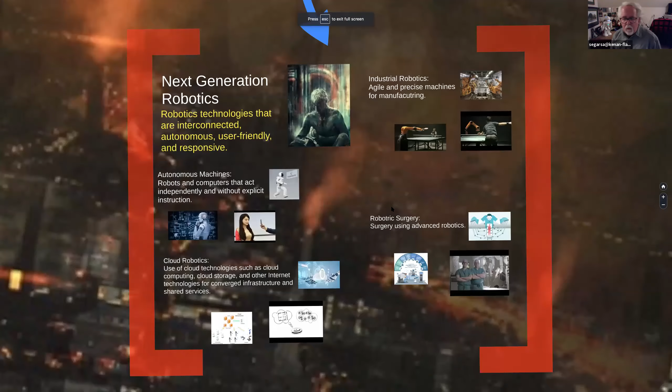So we've gone all the way around the clock here in terms of our 7 technologies. This is the 7th technology. And I'll have to say, also, one of my favorites, perhaps because of a lot of the experience I've had in my own background. But basically, next generation robotics are interconnected. They can be autonomous. They're user-friendly and responsive. So don't think of robotics as what we've seen in the past.

This is a new generation of robotics that uses cloud computing, that uses mesh networking, very close range, high bandwidth type of communication. And those robotics are user-friendly and very responsive to our commands, and actually, in some instances, anticipating what we need. And of course, if you just want one to rock out with you, they're good for that too. So they're a whole different generation of robotics, revolutionizing everything from manufacturing all the way through human interaction. An incredible frontier out there.

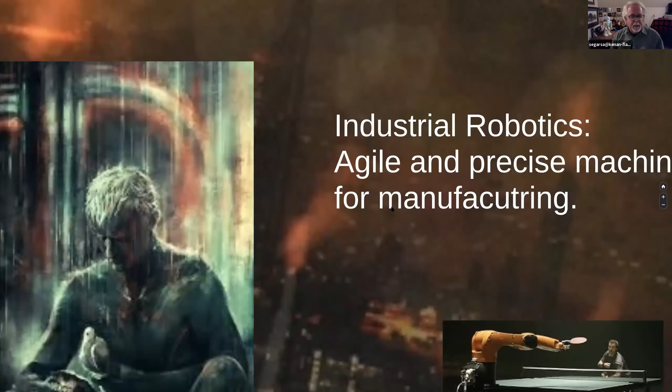So let's take our first stop, and this is industrial robotics. Again, agile and precise machines for manufacturing. This is incredible in terms of what has transpired and how these machines have evolved over time. And you can see in the photograph there to the right, this is a Toyota factory, and these are KUKA robots from Germany that are actually working on this particular automobile. And again, everything from welding all the way through metal fabrication to even the installation of electronics. These are done by industrial robotics.

And what's really interesting about this, if you've ever worked in production, one of the costs of production is called staging. And basically in staging, what happens is you have to restage a production line for a different run of an automobile or any product. And staging costs can be very, very high. And it can be very expensive to move equipment in and out of staging areas. That has radically changed with robotics these days.

Robots can stage several different production lines without moving equipment around, without a whole lot of work other than reprogramming the robotics for the different product coming through the line. So your staging costs are going way down.

That means you can customize a lot more. So when you start to think about the impact of these different technologies, you have to think a little bit about how they're evolving, not only in terms of what they're able to do mechanically, but also what they're able to do in terms of changing business models, changing different production lines, and changing the way a company might think about its products as well as its manufacturing. You're really starting to see a lot of revolution that I think is new and novel, giving rise to a lot of different applications.

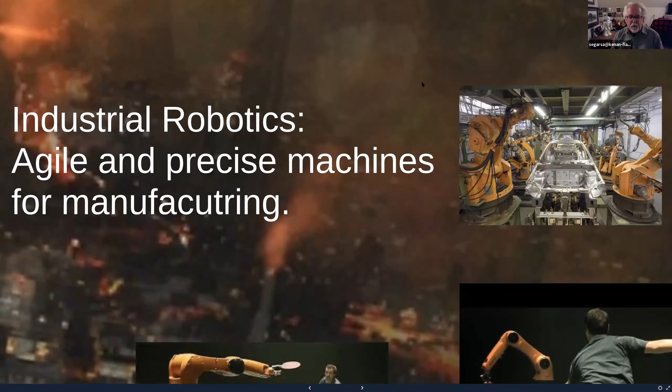Let's show you an example of how agile, how precise these machines can be. One of the companies we visited for this research was KUKA Manufacturing, KUKA Robotics, and they actually have a demonstration technology, a robot that can play ping pong at a world-class level. So let's take a look inside the technology.

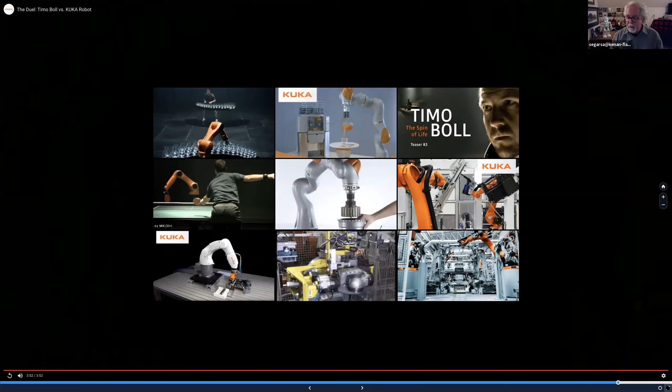Well, about all you can say about that is simply wow. Absolutely amazing what we're seeing in terms of innovation around robotics.

And again, they actually demonstrate this in their lab and really let you see how the robot reacts to different players. It's pretty amazing. The only thing that's different is the ball is coated with a polymer that can be read by the robotic as the ball moves, and it has pre-programmed types of moves to follow and track the ball and respond, even with English or spin on the paddle, to make the ball move in certain ways.

And of course, what you saw in the presentation, which was really interesting, is the one weak spot of the robot: when Timo starts to give the robot exceptions, like hitting the edge of the table or hitting the ping pong ball very high out of the robotic's reach, the robot did not have a response to that, and that's how he eventually defeated the robot. But the thing to really think about is this notion of how agile and how precise robotics have become.

Absolutely amazing. Well, if you have a single robot that can do these incredible things, what if we were able to coordinate robotics together, to have them work together, share information together? That's really the height of artificial intelligence, when machines not only share information, but start to communicate it across to each other so they're informing each other about conditions, about uncertainties, gathering data, sharing data, and turning that into analytics and even into knowledge.

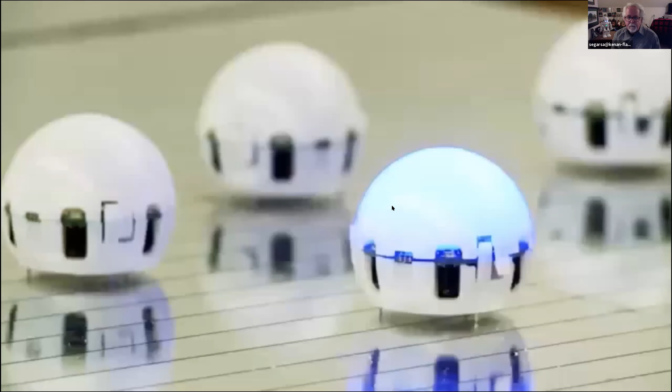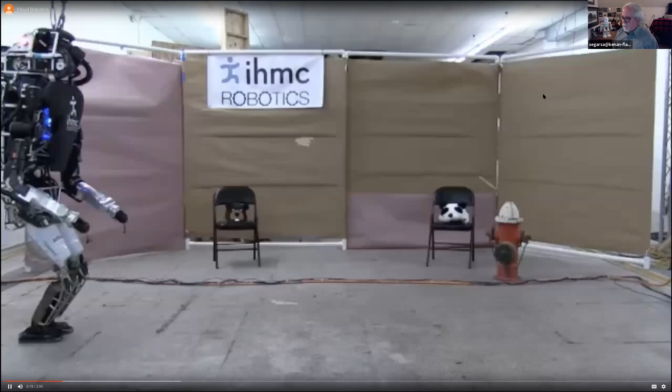What is cloud robotics? Cloud robotics involves robots that are connected to the cloud, in other words, the internet. This means these robots receive information from the cloud and learn by talking to other robots and data centers on the internet. Conventional robots depend on onboard systems to perform calculations and determine how they behave while operating. The more data a robot has to process, the larger its processing systems must be, meaning the size of the robot often increases due to a need for more processing power.

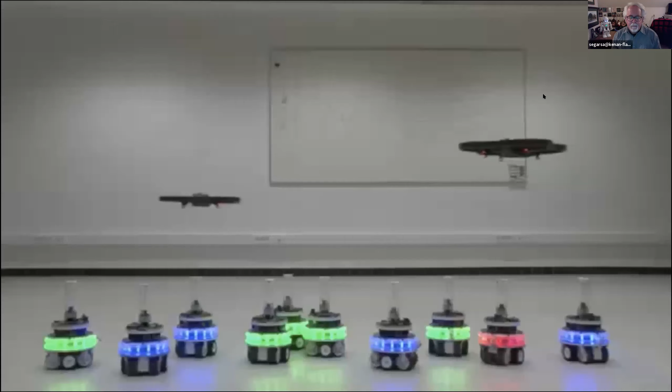However, cloud robotics helps to solve this. Rather than relying solely on a large onboard processing system, a cloud robot can use programs on the cloud to help it process data and perform calculations. Along with computation, the cloud provides cloud robots with a large database of information, including video and image analysis and mapping.

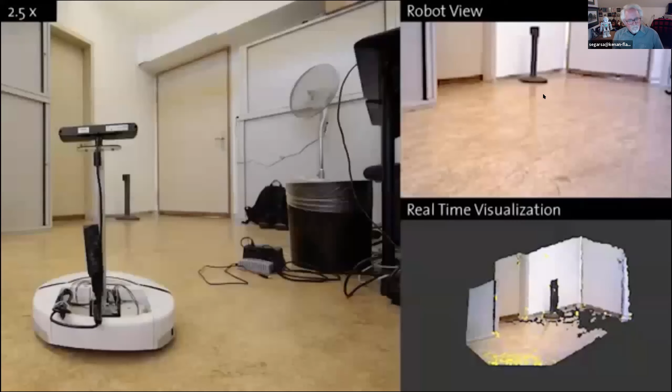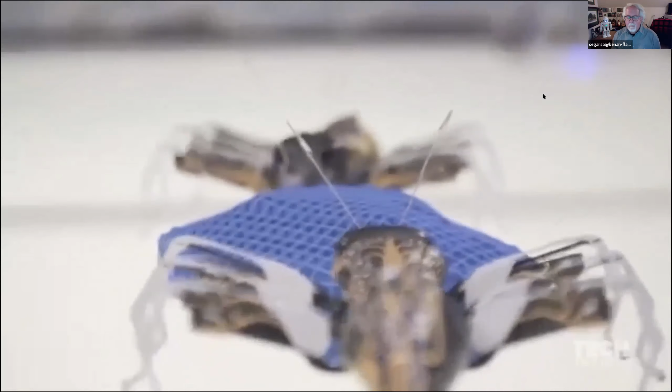In addition to providing processing and analysis services to robots, the cloud facilitates the sharing of data for robot learning. Cloud robots connected to a common network can share data with one another, and each individual robot can use this information to make decisions based on what it learned from the group.

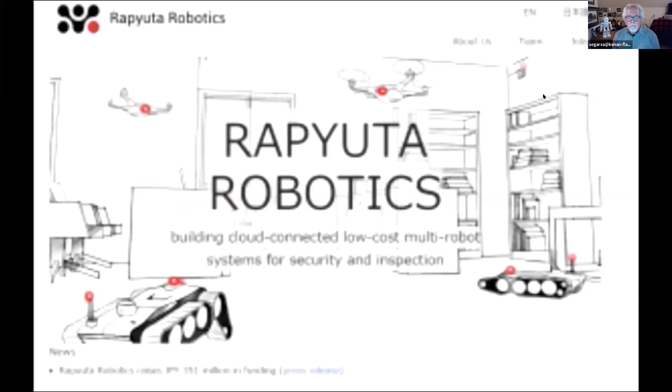An example of a cloud robotics project is RoboEarth. RoboEarth uses an extensive network and database repository with the purpose of sharing domain task experiences of robots to help other robots be more adaptive in similar task environments. To demonstrate the general idea behind cloud robotics, let's look at RoboEarth's cloud engine, Rapyuta.

Once the robots have finished sharing data between one another and the RoboEarth databases, the floor cleaning robot can then decide what is the best action to take based on the data shared with it. This is just one of many examples of cloud robotics and how it can be applied. With the rapid growth of technology in today's world, cloud robotics continues to grow in adaptability and application.

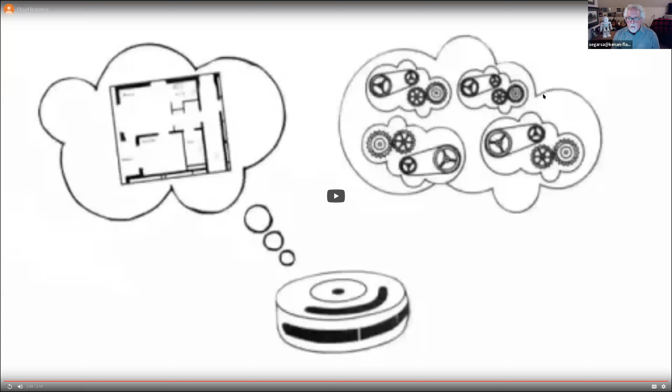Sorry about that. It's an incredible technology that's really revolutionizing a lot of different things. If you're interested in project number 2 and looking for a cool technology to really understand, particularly if you're interested in operations or supply chain, cloud robotics is absolutely amazing.

It is a very, very emerging technology, emerging fast. A lot of manufacturing companies are adopting it now. And it is absolutely amazing to see how quickly it came upon the scene.

But what enables it is the evolution in wireless networks, evolution in satellite networks, and evolution in pervasive computing platforms, cloud computing, and distributed computing, which is where you move processing and storage out to the edge, so edge computing. I hope you're starting to see how combinations of these technologies are creating almost magic, things we never thought of before, things we could only dream about even five years ago.

Just absolutely amazing. Well, let's take a look at robotic surgery. Certainly robots have their impact on manufacturing, but they are also having great impact in the healthcare field, and one of the technologies that's really interesting is robotic surgery.

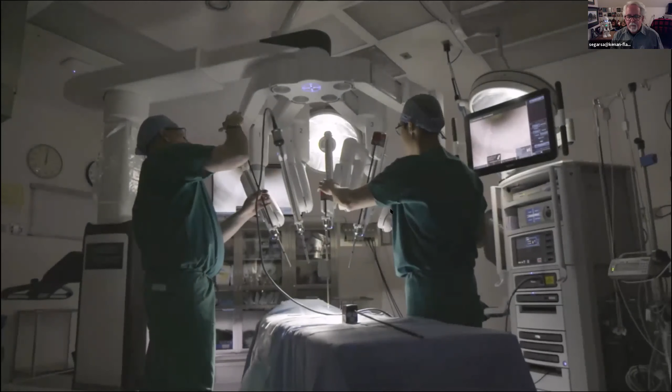Robotic surgery is a very complex laparoscopic surgery. The best way to describe that is there's a computer in between the physician and the patient. The care we're providing, the hernia techniques we are performing here is like no other. It immerses them inside the body.

The high definition in 3D, they can see structures and vessels and nerves that you can't see with the naked eye. Robotics has allowed our physicians to offer our patients a better chance of leaving the hospital faster, less pain, less blood loss, quicker recovery. They get back to work faster, they get back to their family faster.

Carol is the perfect example of a patient who benefited from robotic surgery. On my right side of my stomach, there was like a lump. It was probably the worst pain I've ever had in my entire life. I told my husband if it doesn't go away by the morning, we were going to have to call an ambulance or something. It took everything I had just to get through the basics of the day.

Dr. Jane Varner from Santa Clara referred me to Dr. Strickhartz in Mountain View, and he was honest enough to say, I don't think I can do this robotically, Carol. And here's a doctor that can do this without having to do an extensive incision. She had a very large incisional hernia. In most places, this hernia would have been fixed open. I was able to offer her robotic surgery through 3 little incisions.

Okay, you get an idea about what is out there in terms of robotics. Again, that is certainly not all of the robotics being developed out there. There are all kinds of models designed to incorporate that engagement piece and to utilize artificial intelligence. Certainly there's some engineering that goes into building the mechanics that allow for lifelike movement, as I showed you earlier with my rock and roll robot here.

This is actually a prototype of an Alexa type of technology.

Alexa, Oh no, what time is it? The time is 11:05 p.m. 11:05. Alexa, what's the weather? Right now in Winston-Salem, it's 54 degrees Fahrenheit with clear skies. Tonight's forecast has clouds with a low of 54 degrees. Ooh, yeah, I would wish spring would come. Hopefully, sometime soon. Alexa, what's the meaning of life? Eleanor Roosevelt said, "The purpose of life is to live it, to taste experience to the utmost, to reach out eagerly and without fear for newer and richer experience." Not bad, not bad. I wondered for the longest time, and now we know.